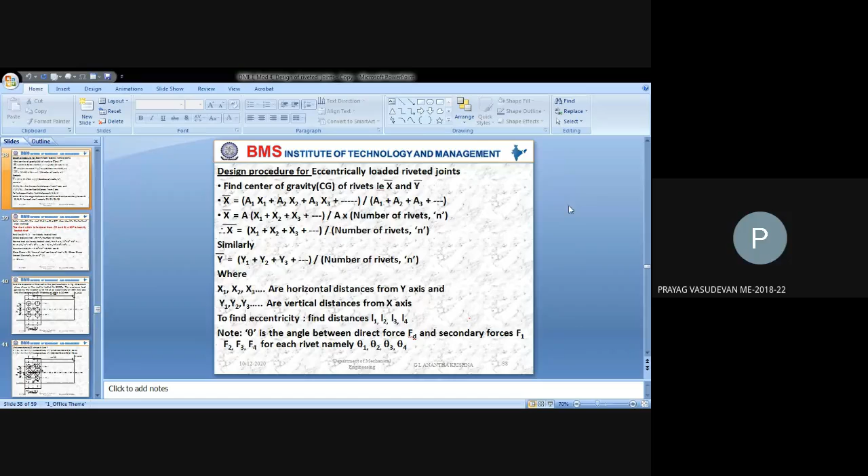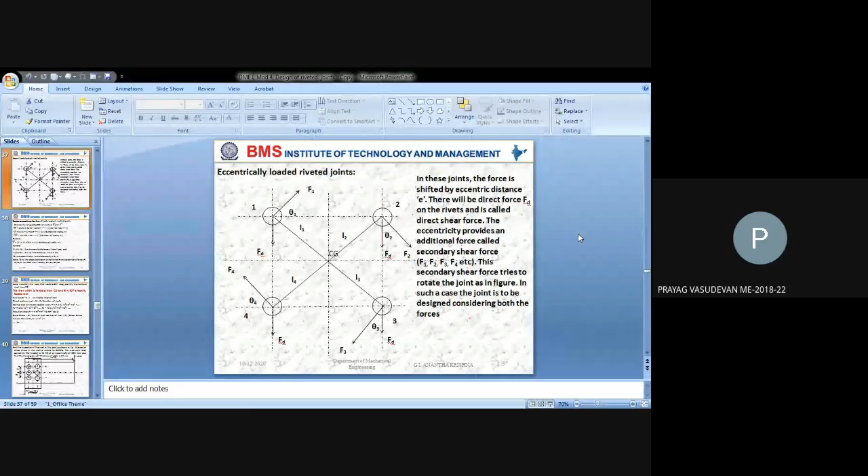Where did we stop last class? Somewhere here. So we wrote down the design procedure, noted it down. Okay, anyway, we'll recap once again.

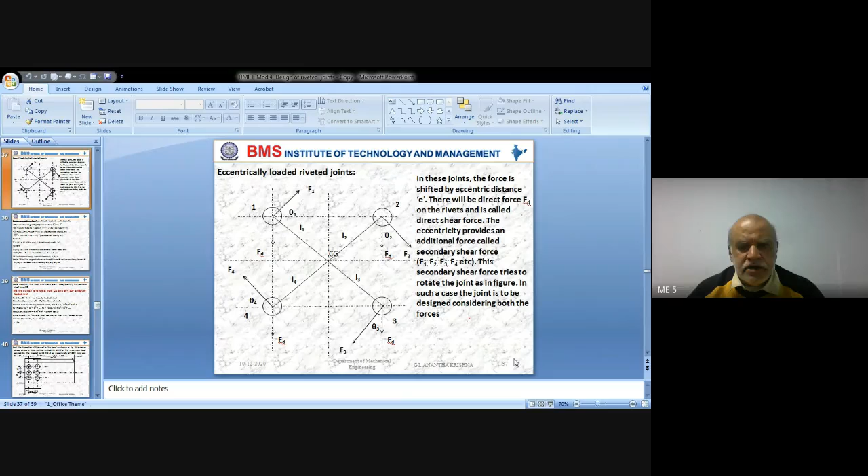Just what we have is the riveted joints. So number the rivets 1, 2, 3, 4. Then from CG, join to the center of each of the rivets, call them L1, L2, L3, L4 accordingly. Draw lines perpendicular to lines L1, L2, L3, so on, which will indicate the secondary shear force F1, F2, F3, and F4.

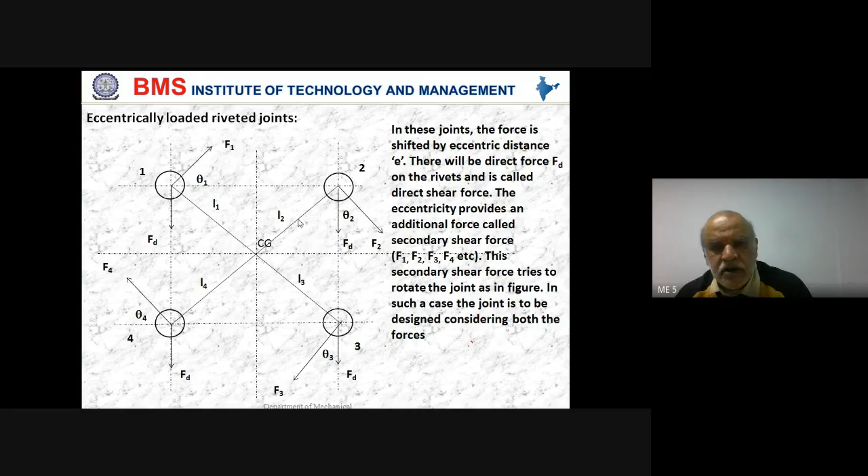Direct load will act on each rivet in the direction of applied load. The angle between direct shear force and secondary shear force is angle theta 1, theta 2, corresponding to the rivet numbers 1, 2, 3, 4. This will induce shear stress.

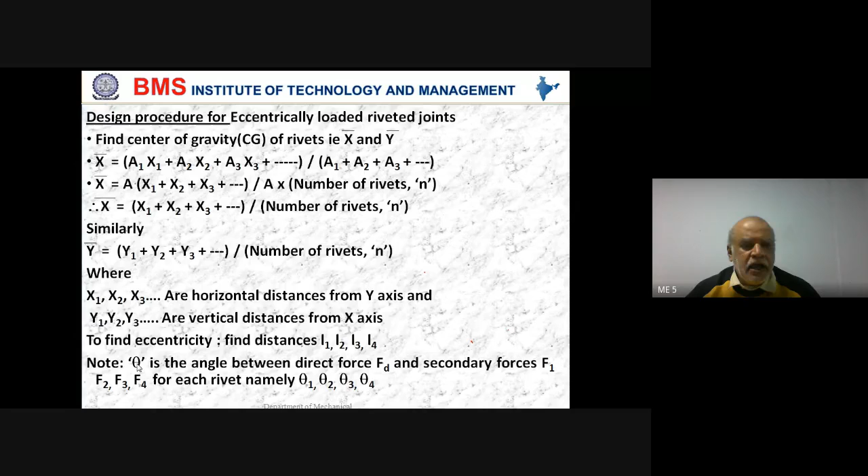What we have taken is we have to find out the center of gravity of the joint by finding out x bar and y bar. And we need to find distances L1, L2, L3, L4. Then identify the rivet which is farthest from CG and theta less than 90, which is considered as the heavily loaded rivet. Then for that heavily loaded rivet, find out cos theta, then direct load, load by number of rivets, normal load on heavily loaded rivet we are going to find out.

So if rivet number 1 is heavily loaded, then we consider L1 as the distance, and in the denominator it is sum of all the distances squared. Then a resultant load we are going to find, and then shear stress is equal to load by area of the rivet. From there we can find the diameter. So our design procedure we have taken now.

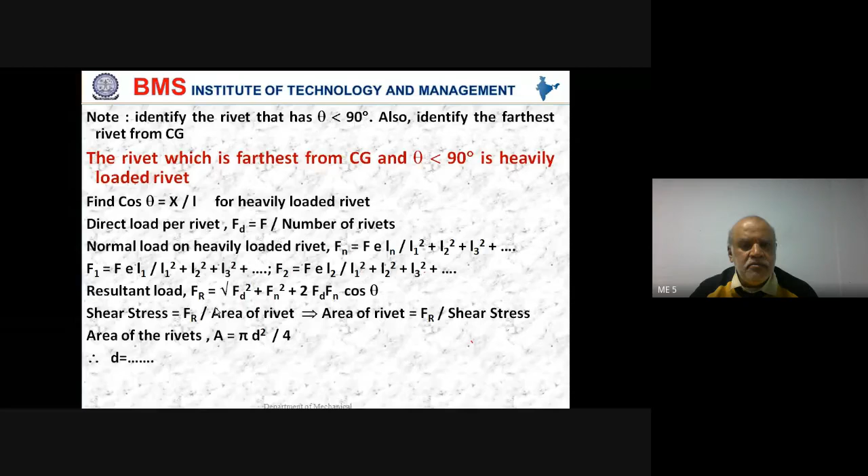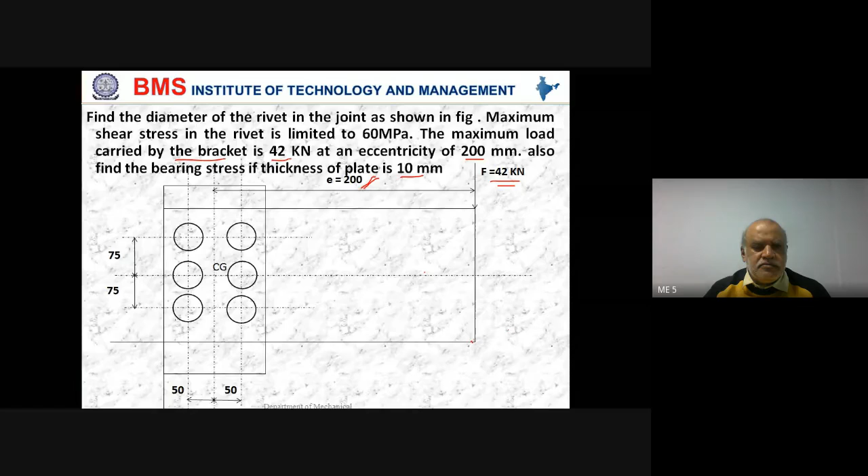This is 50 here, okay? Same 50 I am writing here. This is 75. Note down both the sketch and the problem, and then let me know.

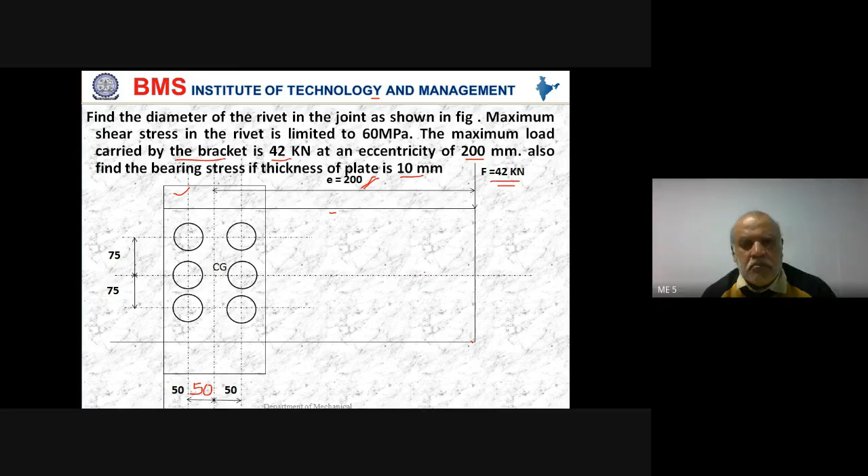This is one plate and this is the second plate, which are fastened together through riveted joints. Finished? Finished writing? One minute, sir. I'm done, sir, done, but sketch is also over. Prayag, note it down. Yes, sir.

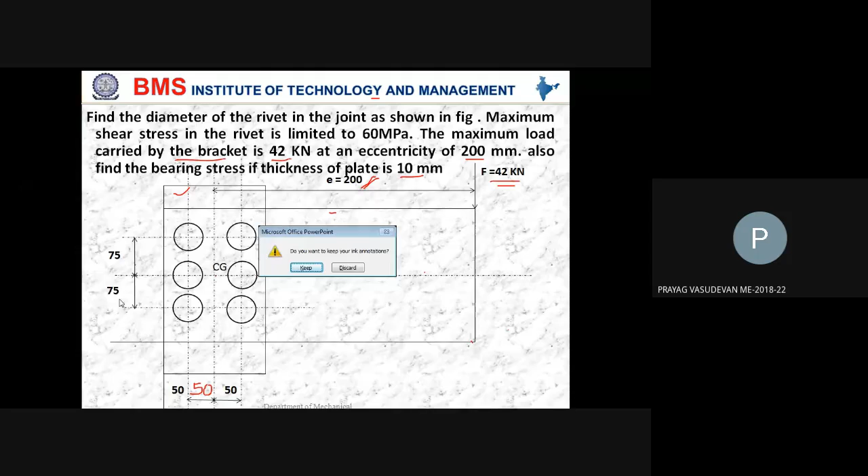Okay, we'll look at the analysis part. Now, first job is to find center of gravity of the riveted joint, by taking sum of the distances. So for x1, x2, x3 values, how we are going to go about is take the y-axis as the reference. Can you see this? This is the reference line for taking distances in horizontal direction. Are you with me now? Are you with me, Prayag Mundia?

Yes. So the rivet number 1 distance is going to be 0 because it's on the y-axis, and distance 2 is 50 plus 50 put together is 100 mm. So rivet number 2 is 100, rivet number 3 is at a distance of 100, rivet number 4 is also at a distance of 100, whereas rivets 5 and 6 have distances equal to 0, 0. So therefore add and you will get the x direction CG distance at 50 mm. Similarly, come to y bar.

So take the rivet line 4 and 5 as the reference. Once you take that with reference to this line, travel upward, that is in y direction. So rivet number 1 has a distance of 75 plus 75, that is 150. Similarly, rivet number 2 is 150. Rivet number 3 has got distance 75 mm. Rivet number 4 is 0, 5 is 0, and rivet number 6 is 75 again. Find out y bar. Is that okay?

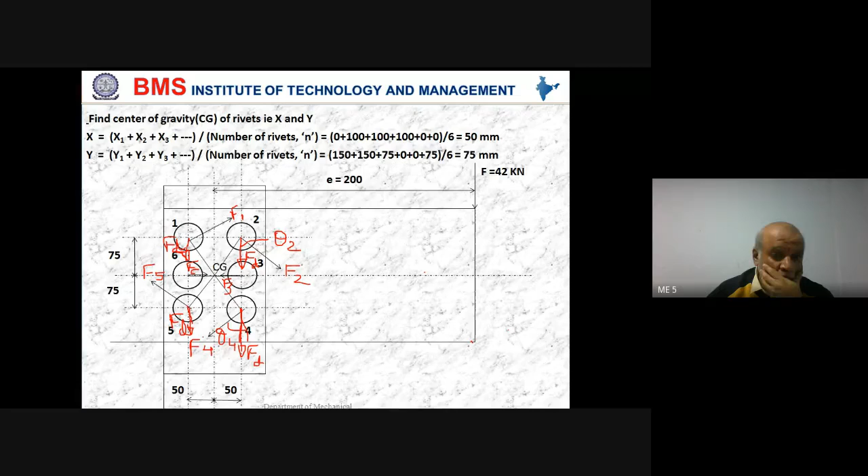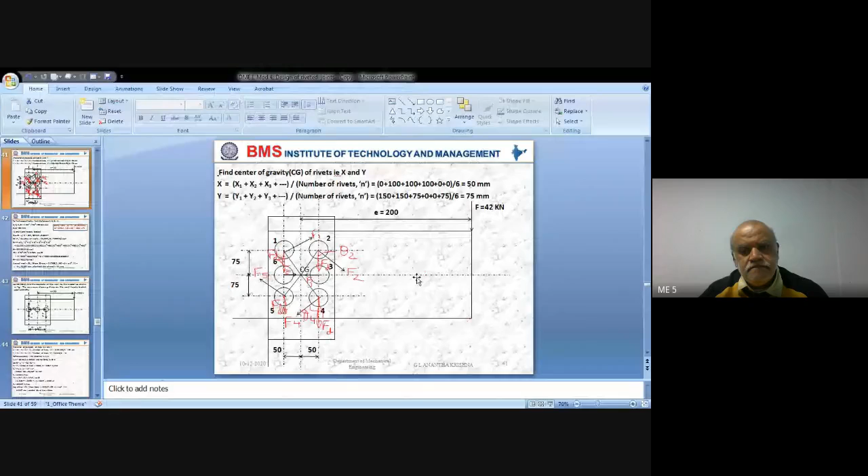Finished, huh? Did you finish? Yes, sir. Okay, now my job is to find the distances L1, L2, L3 and L4, correct? So we have L1, L2, L4 and L5 — this is L1, L2, L4 and L5. How do we find these? By Pythagoras theorem, right?

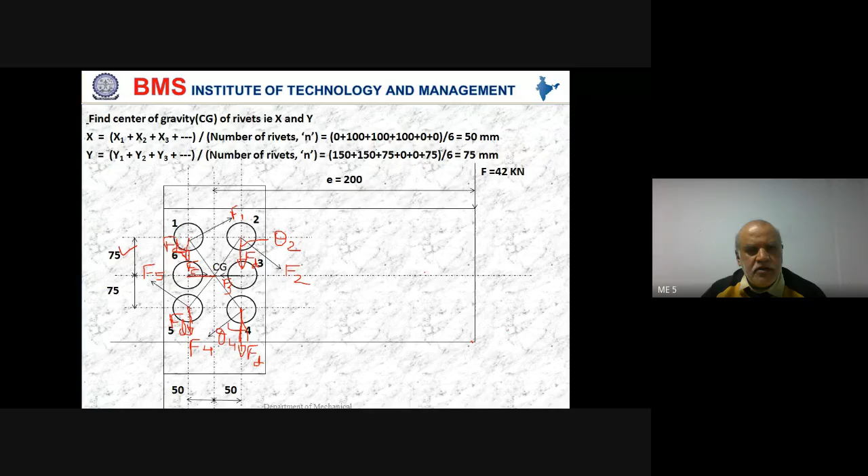So use that. What we have is x direction is 50, y direction is 75. This is 75, and this distance is going to be 50. This is 75. So for distance L1, take the square root using Pythagoras theorem, and calculate L1, L2, L4 and L5. That should give you 90.14 mm. Just calculate and let me know if there's any variation.

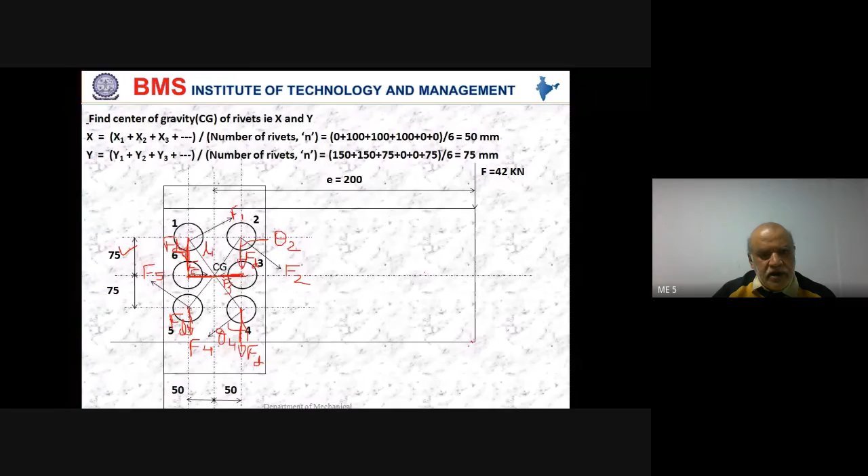Okay. Done? Yes, sir. Next we have L3 and L6. This is the distance, and it's going to be a horizontal distance. What is the value of L3 and L6 now from CG?

What is the value of L3 and L6? 50 mm, 50 mm. Okay, so L3 and L6 is equal to 50 mm. So we have found the distances from the center of all the rivets to CG.

Now we need to identify which rivet is heavily loaded. What is the condition? The rivet should be farthest. So we have L1, L2, L4 and L5 being farthest. We can discard L3 and L6 because that distance is less compared to these four rivets. So the farthest rivets are four.

What is the next condition? Theta should be less than 90 degrees. Come back to the sketch. For rivet 1, theta is larger. For rivet 2, theta 2 is less than 90 degrees. Then theta 4 is also less than 90 degrees.

So L2 and L4 are the heavily loaded rivets, because theta 2 and theta 4 are less than 90 degrees compared to theta 1 and theta 5. Are you with me? Yes, sir. Right, so rivet number 2 and rivet number 4 are heavily loaded rivets.

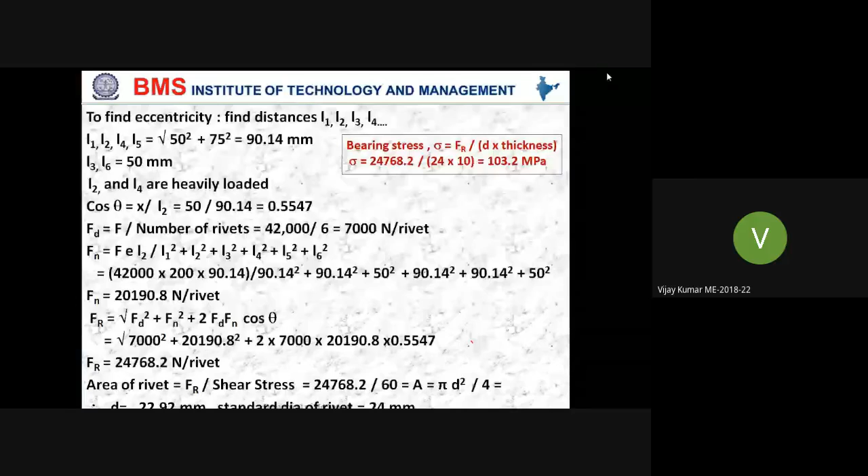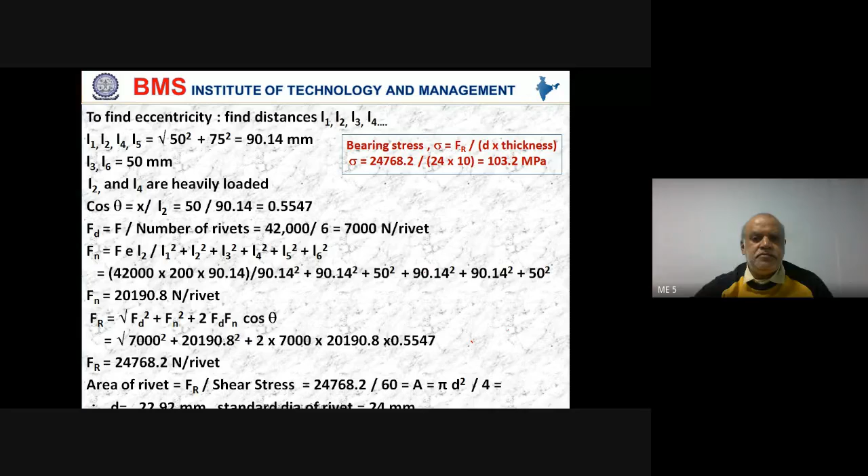Finished noting down? Finished? If you are finished, are you there? Yes, sir. Done. Okay, okay.

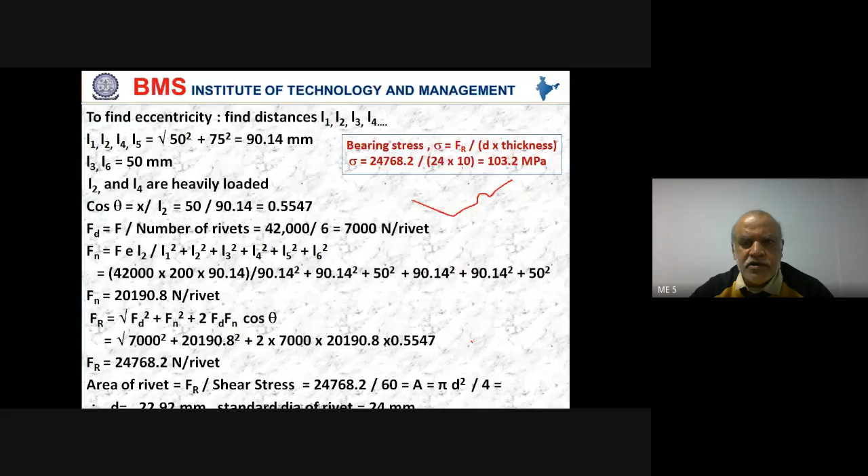So coming to bearing stress, how to calculate bearing stress, I'll explain. This is the plate under consideration, the plate that is to be riveted. I take a cut section of that plate, so it will look something like this.

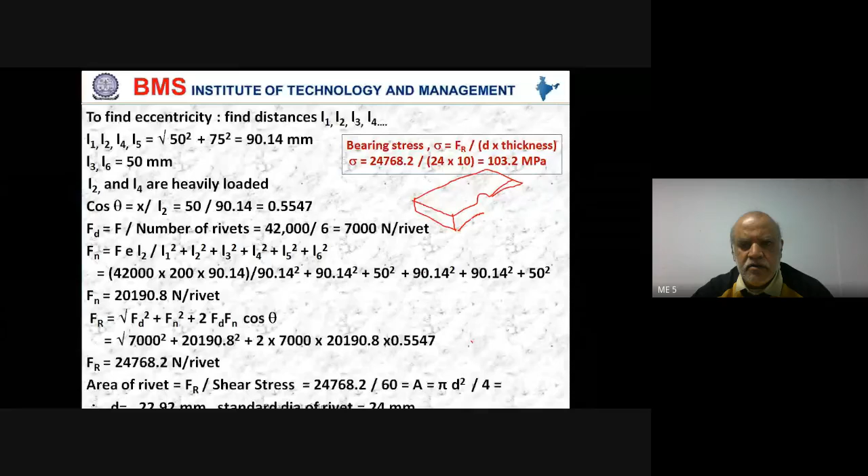Okay, so whatever the bearing stress is, that means this projected area—if it is the semicircular groove, okay—when you take the projected area, it's going to be a rectangle, correct? It's going to be a rectangle. Are you with me? Are you with me?

Yes, sir. So this will give you what is this distance—this is thickness. And what will be this distance? It's going to be diameter, correct? So this is the diameter of the hole, and T is the thickness.

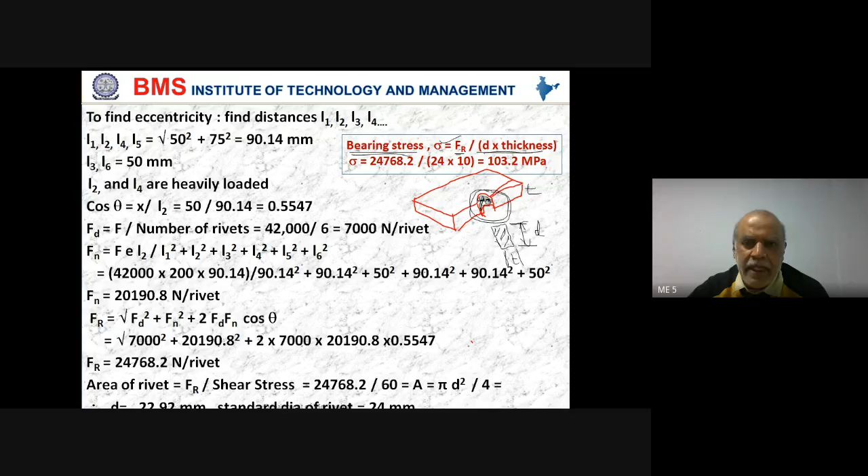So when you take the projection of that semicircular groove, what we get is a rectangle. For that rectangle, area of cross section is given by D into T. So when you calculate bearing stress, the resultant load divided by the projected area of this semicircular groove is what we need to take. Therefore, sigma, bearing stress, is equal to resultant load divided by D into T. Is that okay? This groove is where our rivet is going to be, so this surface is subjected to bearing stress.

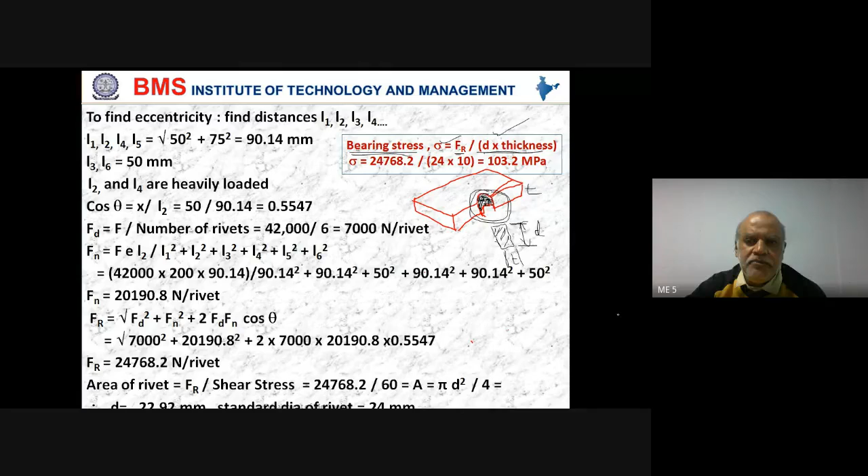So how to calculate area: take the projection of that semicircular groove, which becomes a rectangle. So the area of the rectangle is what we need to consider here for bearing stress calculation. Are you with me? Yes, sir. Finish that, we'll go to the next problem.

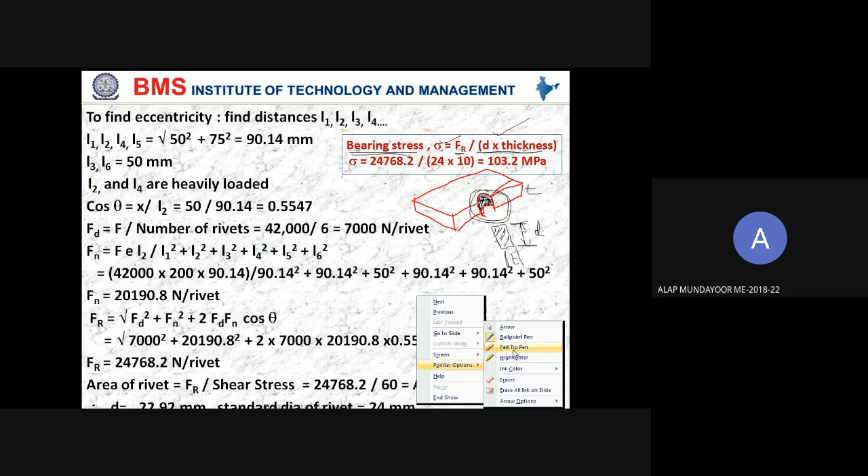Any variation in the answers? Any variation? If you have found any variation? No, sir. Diameter is coming as 22.9. But you need to take the standard diameter from the table, okay? Write it as: standard diameter of rivet from table is 24 mm, okay? Yes, sir.

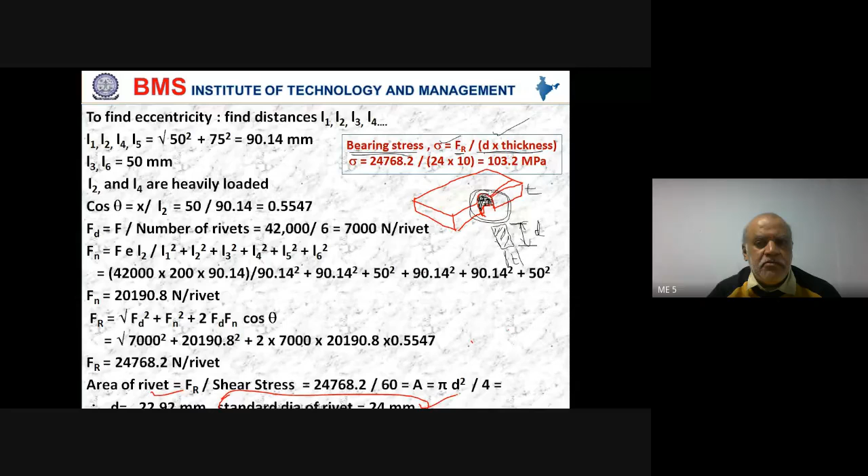Yeah, we'll go to the next problem. Anybody needing time to note down? Okay, take down this problem. Find the diameter of the rivet for the bracket as shown in figure. The maximum shearing stress on the most heavily loaded rivet is 56 megapascal. Please note down the problem and the sketch clearly.

Once you have finished, let me know. We'll go for explanation.

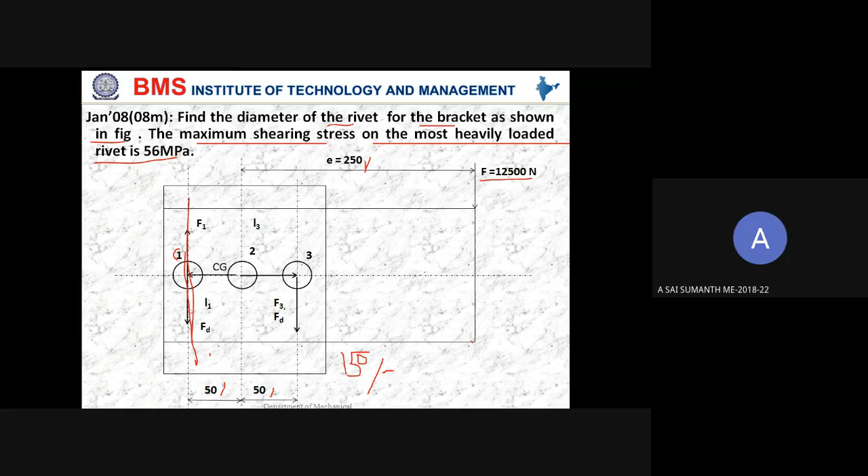What is the value of x bar I am going to get? It is 150 divided by 3, correct? So that's going to be 50 mm. Is that okay? That is the value of x bar, that is center of gravity distance in x direction is 50 mm.

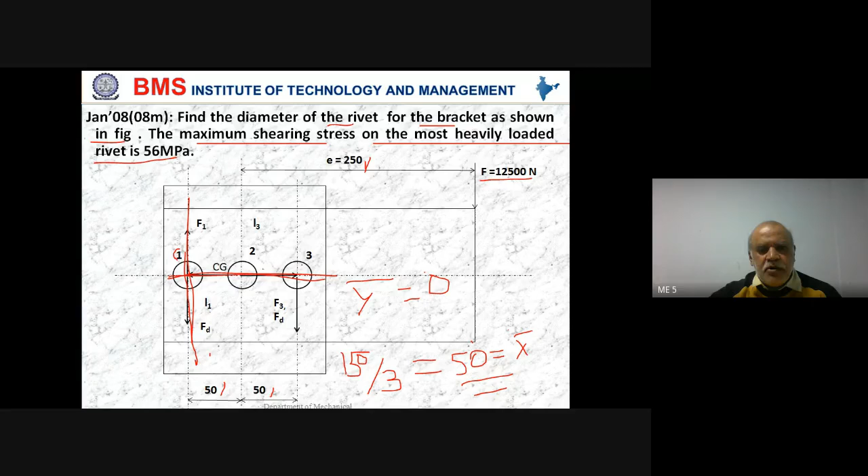And what is going to be the y bar value? So this is where I take the reference line for y bar. So what is going to be the y bar value? 0. Exactly. Others, could you understand why it is 0? Because all the rivets are on the same axis, so there are no rivets above or below. So y distance for all the rivets is 0 plus 0 plus 0 divided by 3. So therefore, we have x bar is equal to 50 mm and y bar is 0.

So that is the location of CG. Then what is that we need to do? We need to find distances L1, L2, L3. So what is the value of L1 and L3? This distance from CG - this is the CG, okay? Distance from center of rivet to the CG is L1, okay?

So this is L1 and this is going to be L3. This distance is L3. Okay, sir, I had a doubt.

Yeah, tell me. While calculating x bar, how is it 50 plus 100? Isn't it 50 plus 50? No, what is the reference line, Chinmayi?

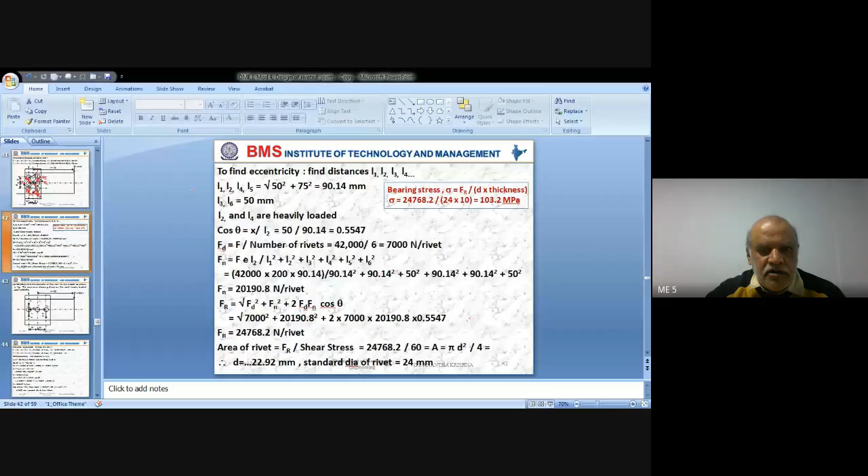Reference line is this - one second. This is the reference line, correct? On Rivet 1, I have the reference line. With respect to the reference line, I need to take distances of 2 and 3 in the x direction. So Rivet 2 is at a distance of 50 mm. Rivet 3 from the reference line is at a distance of 100 mm, correct? Yes sir. So therefore it is 50 plus 100 plus 0 divided by 3.

Okay, got it. Right? Where was I? I was discussing about distance L1, distance L3. L1 is at a distance of 50 mm. L3 is at a distance of 50 mm. And L2 is on the CG itself.

So therefore, what is the value of L2 going to be? Value of L2 is going to be 0. So L1 and L3 is equal to 50 mm. L3 is farthest and has got theta less than 90 degrees.

How is theta less than 90 degrees? Because the angle between F3 and FD - they both lie in the same line. Is that okay? Whereas rivet number 1 has got 180 degrees as theta. This is FD acting in this direction. F1 is acting in this direction.

Whereas F3 and FD both are in the same direction. That is, this is FD, so FD is acting downward. And for this L3 line, this is the perpendicular distance. So therefore, we have theta less than 90 degrees with reference to rivet number 3.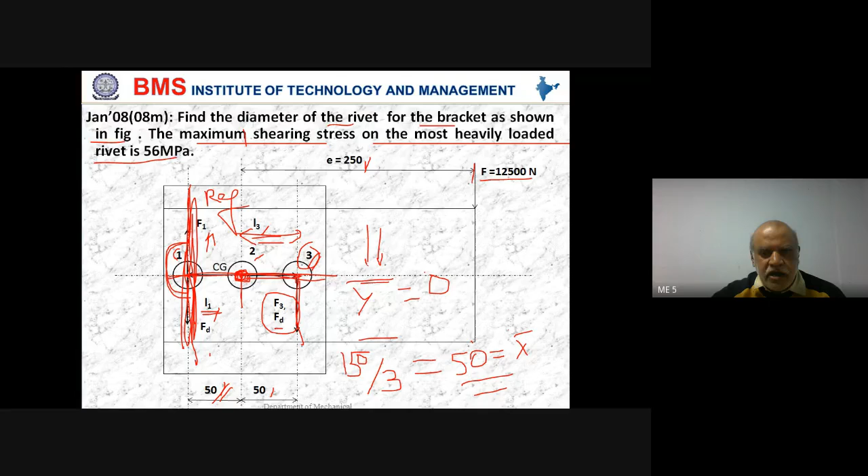Suppose if I take the riveted joint such that this is FD acting and this is F1 acting, in that case what will happen? So this is going to be F3, and for this rivet, it's going to be FD. So either way you can take it, not an issue, because they are at equidistance, right?

So therefore, we have L3 - in this case, I have taken L3 to F3 to be acting along with FD. So therefore, L3 is going to be the heavily loaded rivet, okay? So find out direct load, then find out normal load, then find out resultant load, then find out diameter of the rivet. Is it okay? Anybody, any doubt in this?

It's very easy. You just follow the procedure and solve systematically. Identifying the heavily loaded rivet is very easy: take the farthest of the rivets where theta is less than 90 degrees.

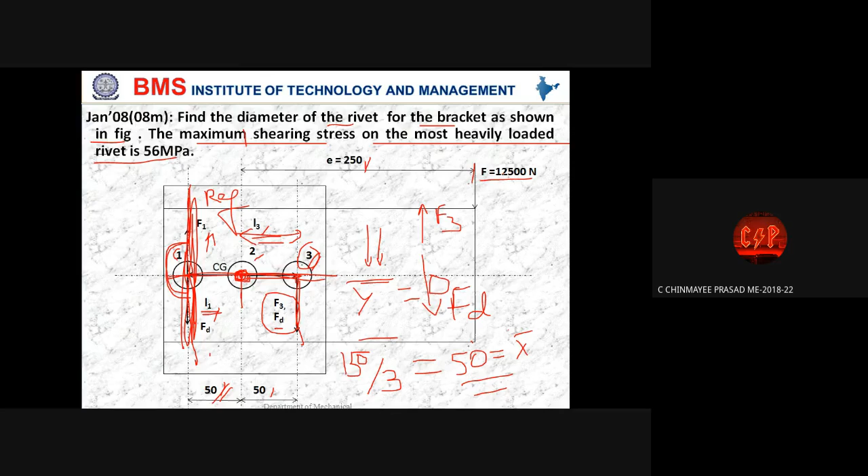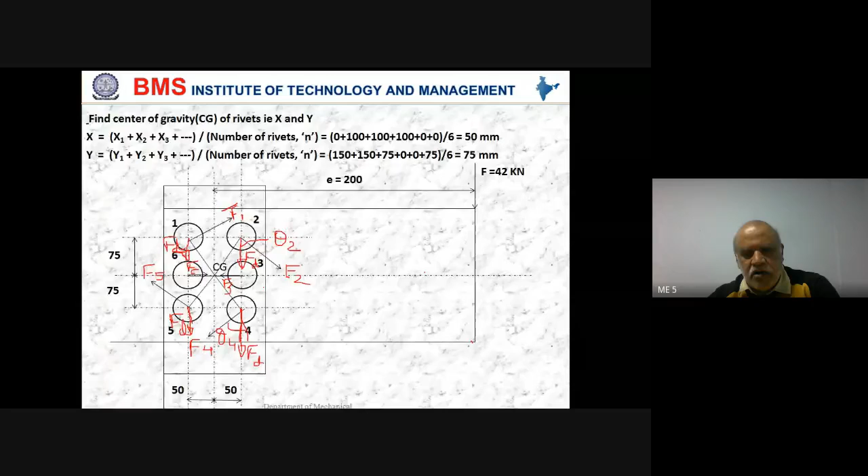In the figure, first draw L1 and L3 from the CG. To these L1 and L3 lines, we need to draw perpendicular lines, as we did in the previous cases, where we drew F1, F2, F3 perpendicular to L1, L2, L3. Similarly here, for the L1 line, while drawing the perpendicular, this also is perpendicular.

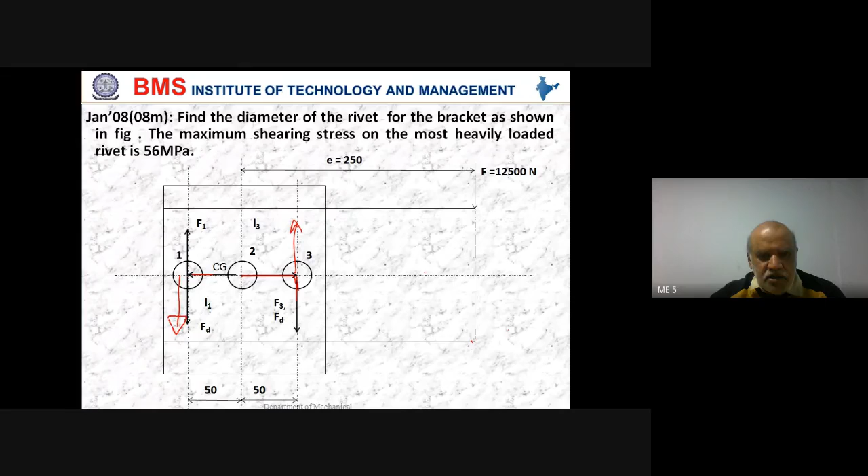But in that case, what happens? My F1 will be in this direction because the secondary shear forces try to rotate the joint about its CG. So if F3 is acting in this direction, then F1 must act in this direction.

In that case, Rivet 1 will become the farthest with theta less than 90 degrees, so Rivet 1 becomes the heavily loaded rivet. In that case also, you will get the same answers. You can take that as the heavily loaded rivet and solve the problem.

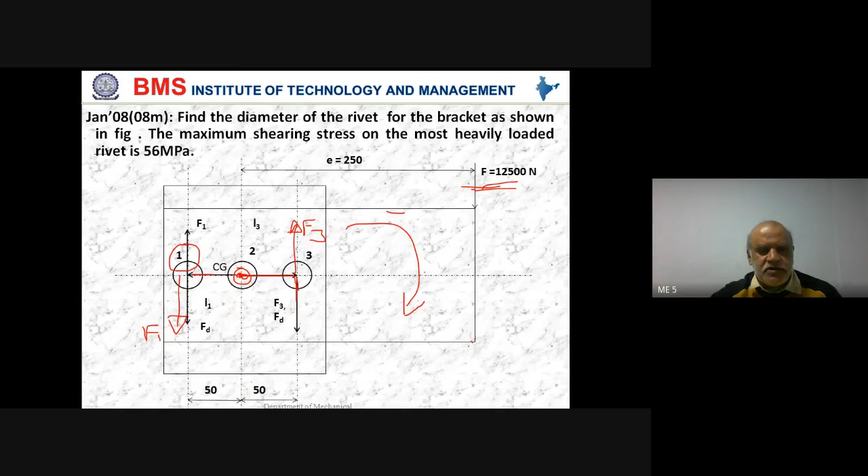Instead, why I have taken F3 in this direction is that my load F is acting downward, so the effect of the F value is to rotate the joint in this direction. That's why I have taken F3 in this direction and F1 in this direction.

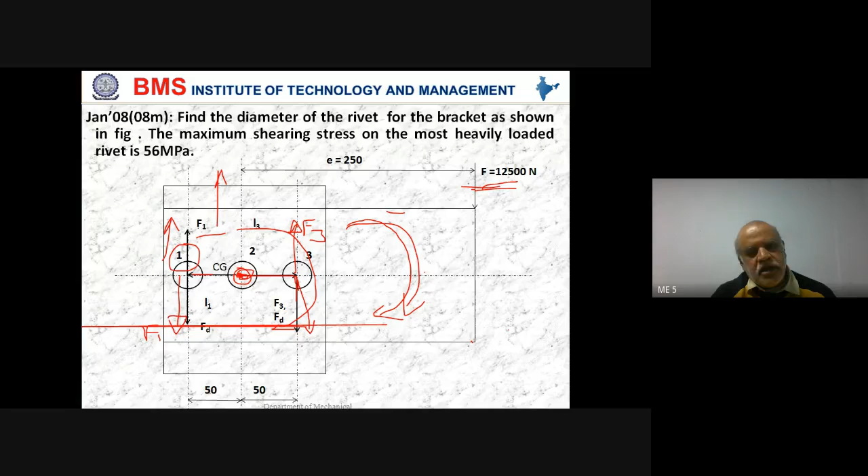So this F will rotate the joint in the clockwise direction about its CG. For the joint to rotate in this direction, my F3 should be in this direction and F1 should be in this direction. That's how we need to determine the direction.

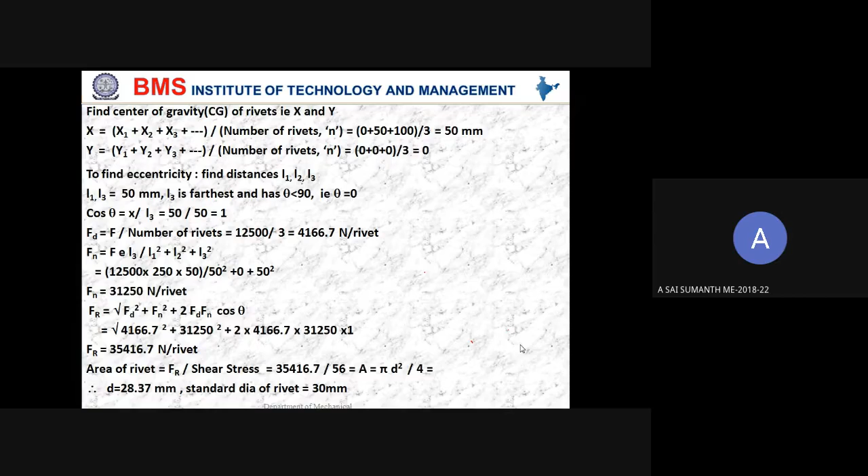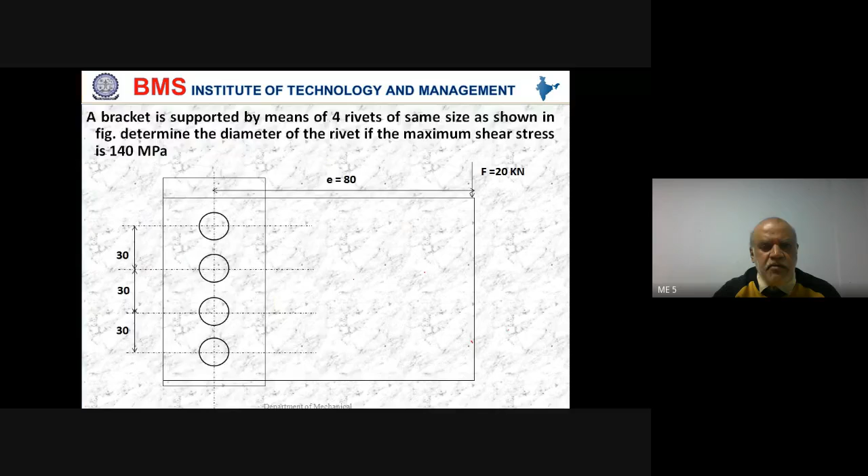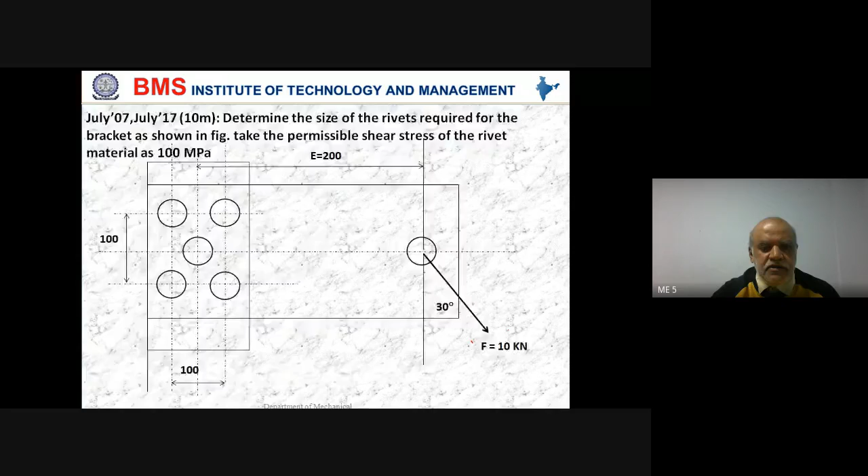Now it's the opposite: all the rivets are on the y-axis, so the distance x is going to be 0 for each rivet, therefore x bar is going to be 0. Y bar is going to be with reference to a line at the bottom. If I take L4 as a reference, calculate the distances for L1, L2, L3, and then try solving this problem.